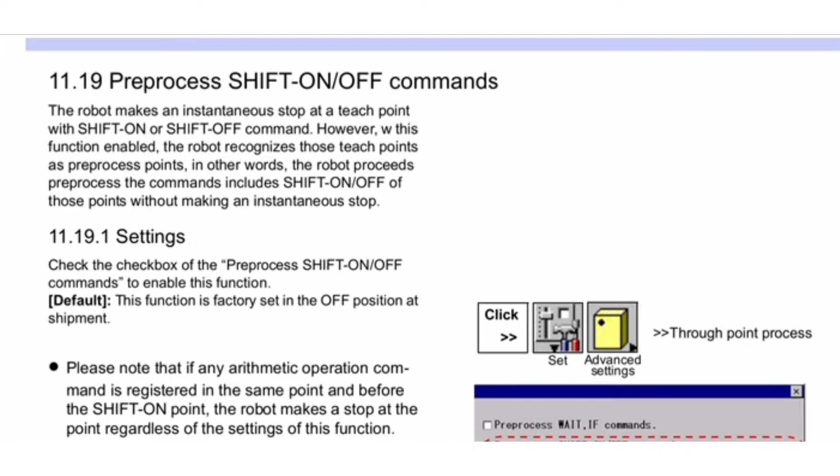This is part 45: pre-process shift on/off commands. The robot makes an instantaneous stop at a teach point with a shift on or shift off command. However, with this function enabled, the robot recognizes those teach points as pre-process points. In other words, the robot pre-processes the commands, including shift on/off, at those points without making an instantaneous

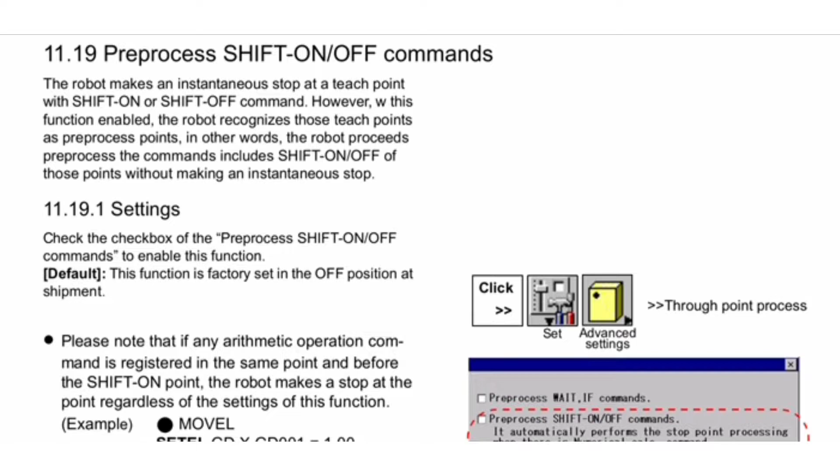stop. Settings: check the checkbox of the pre-process shift on/off commands to enable this function. Default: this function is factory set in the off position at shipment. Please note that if any arithmetic operation command is registered in the same point and before the shift on point, the robot makes a stop at the point regardless of the settings of this function.

Next one is an example: MOVEL, SETEL GD.X GD001 = 1.00, SHIFT-ON GD001. Those arithmetic operation commands are ADD, SUB, MUL, DIV, SET, SETEL, CNVSET, CLEAR and GETPOS.

As for CNVSET and GETPOS commands, the robot makes an instantaneous stop even though the commands are added after the shift on command. The robot makes a stop even if the variable of the arithmetic operation command is not for the shift on command. To avoid such a situation, edit the program so that the calculation of the variables GD or GT for the shift on command is added to the teach point before the one where the shift on command is registered.

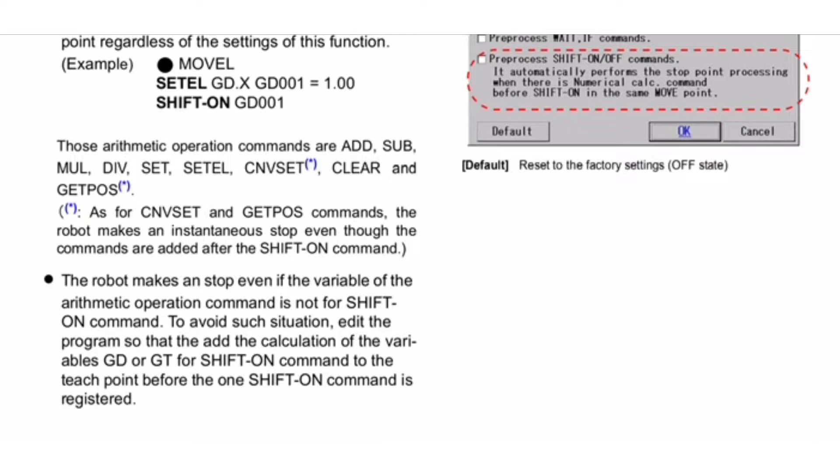Next one is advanced error recovery. What is advanced error recovery? A function that allows the robot to automatically recover from the error condition or escape to the preset position, the marked step. For easy recovery in case of an error, this function can reduce the time and workload required for error recovery. Note: while executing the advanced error recovery function, the following functions are not operable: error handling, resume.

Remarks on usage. This function can be adapted to other uses. For example, it can be used to skip a certain weld section or part of the weld section and continue welding operation from the next weld section. It is possible to skip the recovery process and restart welding operation. Therefore, you can skip welding points where the error occurred and move on to the next welding point to continue welding operation while the robot is in error recovery processing.

It is possible to switch the mode to teach mode to execute manual operation or wire inching. It is not possible to execute trace operation or program edit. Basic movements. First, when a weld error occurs while running a program, the robot makes a weld error stop. Second, the robot escapes to the preset teach point called the marked step with back step or forward step. Third, the robot stops at the marked step or executes the specified program and stops at the marked step.

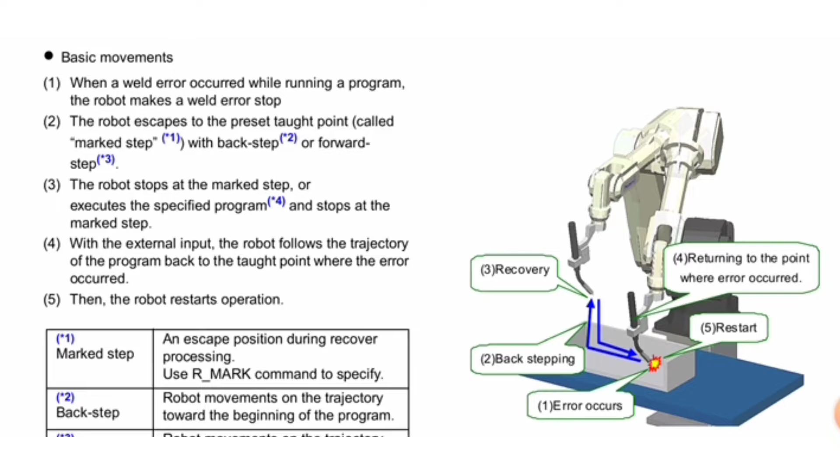One table is given here: marked step and escape position during recovery processing. Use the R_MARK command to specify. Back step: robot moves on the trajectory toward the beginning of the program. Forward step: robot moves on the trajectory toward the end of the program. Specified program: a recovery program such as tip replacement and nozzle cleaning to be registered as an execute statement.

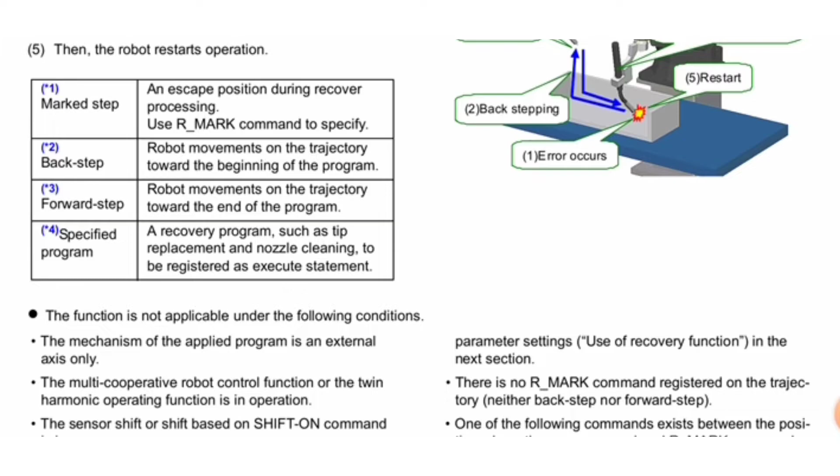This function is not applicable under the following conditions. The mechanism of the applied program is an external axis only. The multi-cooperative robot control function or the twin harmonic operating function is in operation. The sensor shift or shift based on SHIFT-ON command is in process. The shift based on arc sensor or auto extension is in process. The advanced error recovery function is set to invalid. The error that occurred was not subject to the advanced error recovery function. For details, please refer to the parameter settings.

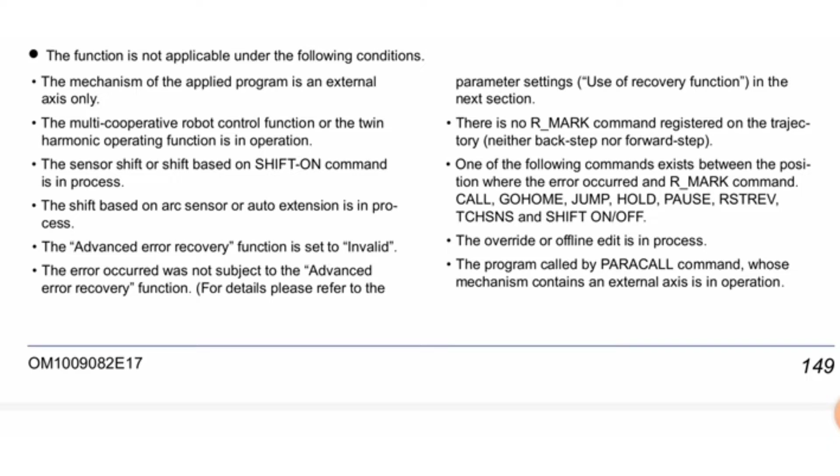Use of recovery function in the next section. There is no R_MARK command registered on the trajectory, neither back step nor forward step. One of the following commands exists between the position where the error occurred and the R_MARK command: CALL, GOHOME, JUMP, HOLD, PAUSE, RSTREV, TCHSNS, and shift on/off. The override or offline edit is in process. The program called by the PARACALL command, whose mechanism contains an external axis, is in operation.

Next one is settings. First, parameter settings. From the list of advanced settings, select advanced error recovery, then complete the parameters on the displayed dialog box and click OK. Valid/invalid: select whether or not to enable this function. Input for..., output for...: specify an input/output terminal for each. Speed limit: specify the speed limit during the recovery processing.

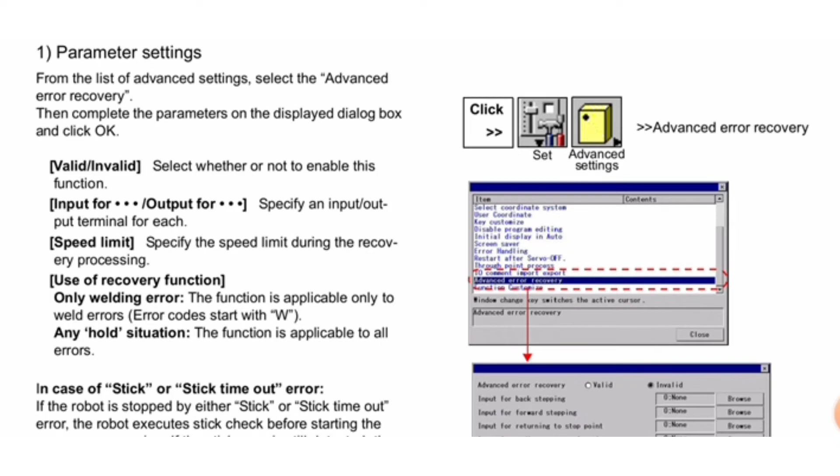In case of stick or stick timeout error: if the robot is stopped by either a stick or stick timeout error, the robot executes a stick check before starting the recovery processing. If the stick error is still detected, the robot makes an error stop. If the restart setting of the stick release function has been set to valid, then the robot executes the stick release operation.

Second, setting a marked step: register the R_MARK command with the program you want to apply the advanced error recovery function to. Register the R_MARK command in the teach point you want to move the robot to for the recovery processing in case of a specified error. To be specific, the robot actually escapes to the teach point of the first move command after the R_MARK command toward the beginning of the program in the back step direction. For details of the setting procedure, please refer to the section on flow commands.

If you would like to execute an error recovery program, such as nozzle cleaning and wire cut, at the marked step, enter the desired recovery program as the CALL argument to the R_MARK command. PARACALL, STOP or GOHOME commands cannot be used in a recovery program. If executed, the warning message E1380, the command which cannot be executed, is displayed.